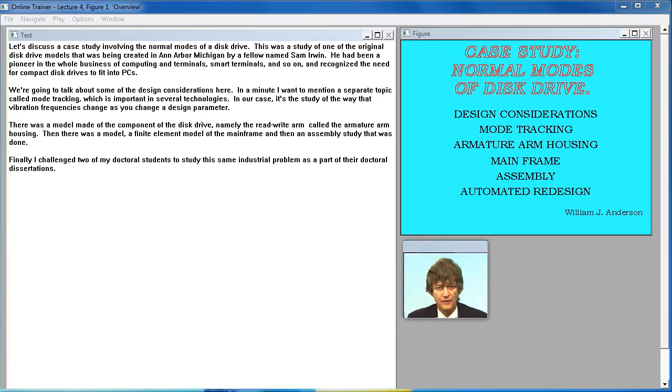Let's discuss a case study involving the normal modes of a disk drive. This was a study of one of the original disk drive models. It was being created in Ann Arbor, Michigan by a fellow named Sam Irwin. He had been a pioneer in the whole business of computing and terminals, smart terminals, and so on, and recognized the need for compact disk drives to fit into PCs.

We're going to talk about some of the design considerations here. In a minute, I want to mention a separate topic called mode tracking, which is important in several technologies. In our case, it's a study of the way that vibration frequencies change as you change a design parameter.

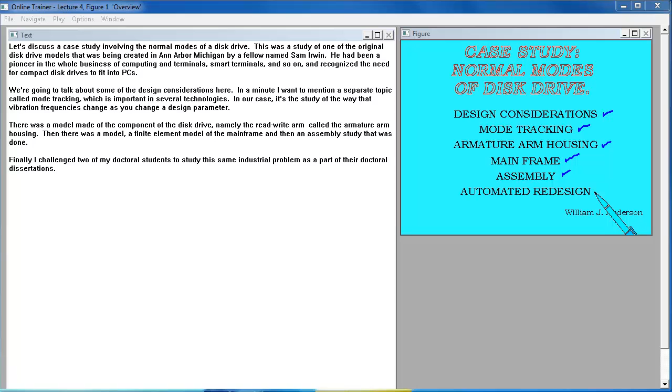There was a model made of a component of the disk drive, namely the read-write arm called the armature arm housing. Then there was a model, a finite element model of the mainframe, and then an assembly study that was done. Finally, I challenged two of my doctoral students to study this same industrial problem as a part of their doctoral dissertations.

The sponsor of this project was Irwin International of Ann Arbor, Michigan. The president was Sam Irwin, who had made his fortune in an earlier corporation that made intelligent terminals. Sam sold that company to a larger corporation and was reputed to have made some tens of millions of dollars on that deal. So this was a new venture, and Sam, I think, correctly interpreted the enormous need for disk drives to be put in smaller computers, such as the personal computers.

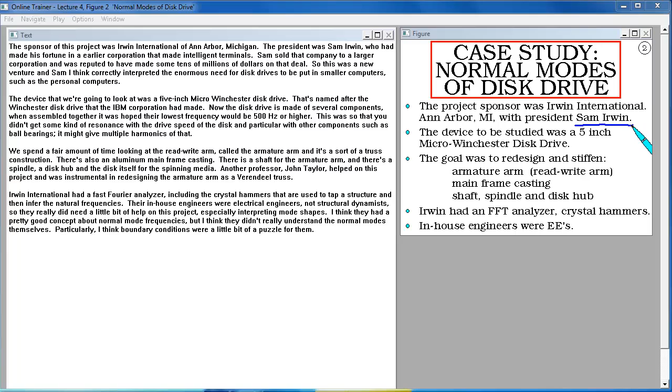The device that we're going to look at was a 5-inch micro Winchester disk drive that's named after the Winchester disk drive that the IBM Corporation had made. Now, the disk drive is made of several components. When assembled together, it was hoped their lowest frequency would be 500 hertz or higher. This was so that you didn't get some kind of resonance with the drive speed of the disk, and in particular with other components such as ball bearings that might give multiple harmonics of that.

We spent a fair amount of time looking at the read-write arm called the armature arm, and it's a sort of a truss construction. There's also an aluminum mainframe casting. There is a shaft for the armature arm, and there's a spindle, a disk hub, and the disk itself for the spinning media. Another professor, John Taylor, helped on this project and was instrumental in redesigning the armature arm as a Vierendeel truss.

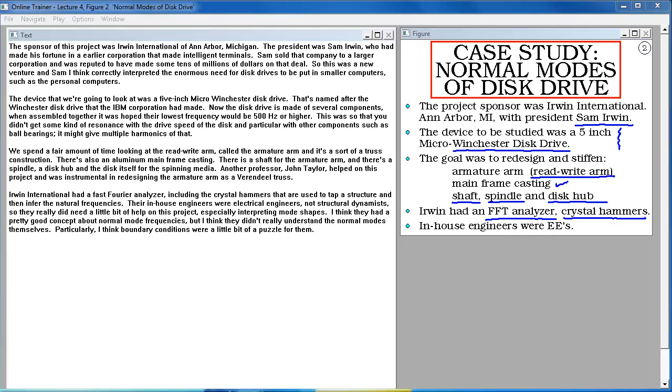Irwin International had a fast Fourier analyzer, including the crystal hammers that are used to tap a structure and then infer the natural frequencies. Their in-house engineers were electrical engineers, not structural dynamicists. So they really did need a little bit of help on this project, especially interpreting mode shapes. I think they had a pretty good concept about normal mode frequencies, but I think they didn't really understand the normal modes themselves. Particularly, I think boundary conditions were a little bit of a puzzle for them.

I can show you one of the disk drives that I picked up from Irwin International. This is one that's a partial assembly. It has the media here, which is a magnetic material that spins. There's a hub that it is clamped to. On the back side, with the spindle protruding through the one side of the casting to the other, is the motor that drives the media.

Over here, this nice arm-like thing is being controlled also by a motor, and positions this read-write arm. And it moves in a rotational way rather than translational, which is probably a little more common today. Both are used nowadays. The Winchester heads are not mounted on here. They were spring-loaded and would read both the top and the bottom side of the disk at the same time.

The hole that you see here was filled with quite a large air filter, and it turns out that filtering out smoke particles is very important. The Winchester head rides something like 12 microns over the surface of the disc, and a smoke particle can be as high as 15 microns bumping up from the disc if it's stuck there. And that can cause the Winchester head to crash. So there is some worry about keeping the bay in which the spinning disc is located absolutely clean.

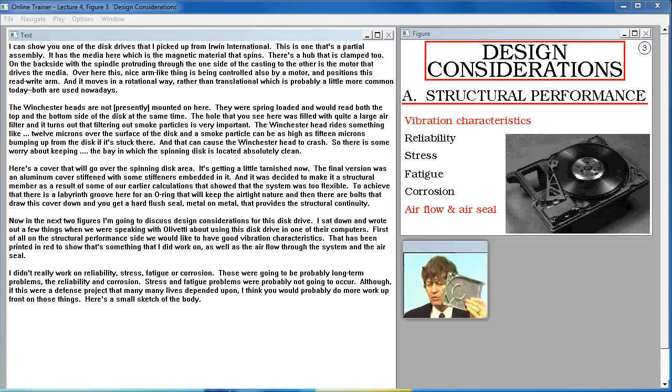Here's a cover that will go over the spinning disc area. It's getting a little tarnished now. The final version was an aluminum cover stiffened with some stiffeners embedded in it. And it was decided to make it a structural member as a result of some of our earlier calculations that showed that the system was too flexible.

To achieve that, there's a labyrinth groove here for an O-ring that will keep the airtight nature, and then there are bolts that draw this cover down, and you get a hard flush seal metal on metal that provides the structural continuity.

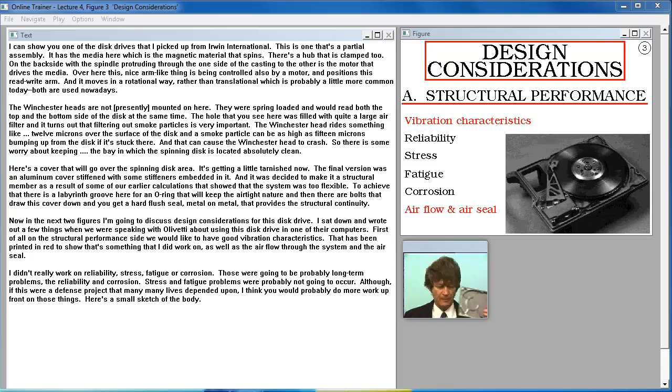Now, in the next two figures, I'm going to discuss design considerations for this disk drive. I sat down and wrote out a few things when we were speaking with Olivetti about using this disk drive in one of their computers. First of all, on the structural performance side, we would like to have good vibration characteristics. That has been printed in red to show that's something that I did work on, as well as the air flow through the system and the air seal.

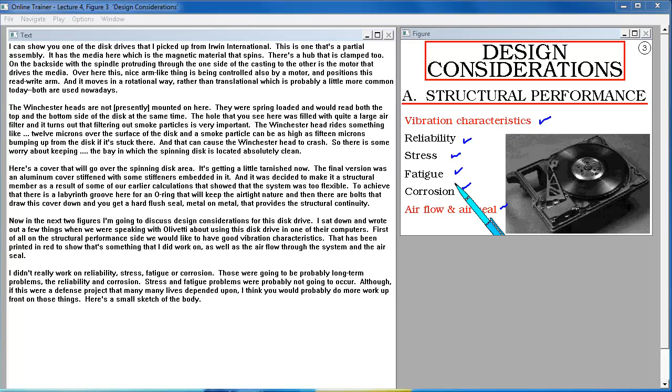I didn't really work on reliability, stress, fatigue, or corrosion. Those were going to be probably long-term problems, the reliability and corrosion. Stress and fatigue problems were probably not going to occur, although if this were a defense project that many lives depended upon, I think you would probably do more work up front on those things. Here's a small sketch of the body.

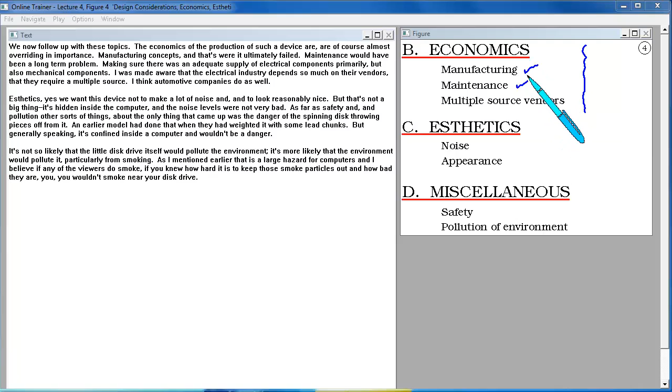We now follow up with these topics. The economics of the production of such a device are of course almost overriding in importance. Manufacturing concepts, and that's where it ultimately failed. Maintenance would have been a long-term problem. Making sure there was an adequate supply of electrical components primarily, but also mechanical components. I was made aware that the electrical industry depends so much on their vendors that they require multiple sources. I think the automotive companies do as well.

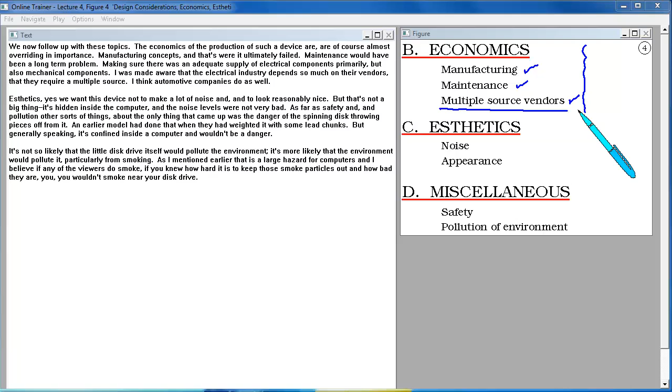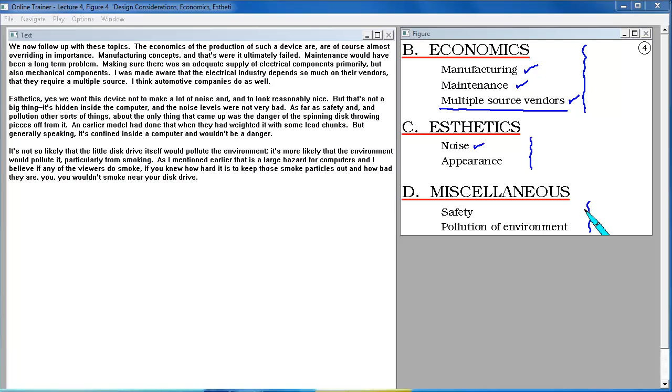Aesthetics. Yes, we want this device not to make a lot of noise and to look reasonably nice, but that's not a big thing. It's hidden inside the computer, and the noise levels were not very bad. As far as safety and pollution, about the only thing that came up was the danger of the spinning disc throwing pieces off from it. An earlier model had done that when they had weighted it with some lead chunks. But generally speaking, it's confined inside a computer and wouldn't be a danger.

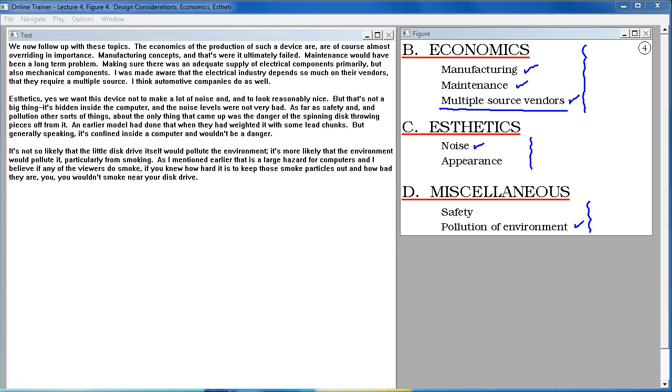It's not so likely that the little disk drive itself would pollute the environment. It's more likely that the environment would pollute it, particularly from smoking. As I mentioned earlier, that is a large hazard for computers, and I believe if any of the viewers do smoke, if you knew how hard it is to keep those smoke particles out and how bad they are, you wouldn't smoke near your disk drive.

Earlier I mentioned the concept of mode tracking. That's a fairly important problem in several industries when you're trying to follow the natural frequencies of a system over some parameter range. Now for aircraft, often wind speed is the parameter that's changing. And people like to do ground vibration studies or air off studies and then check those frequencies again as the system is flown 100 miles an hour, 200, 300, and so on. Sometimes what happens to those natural frequencies and the shape of the normal modes can determine whether you get wing flutter or other bad situations.

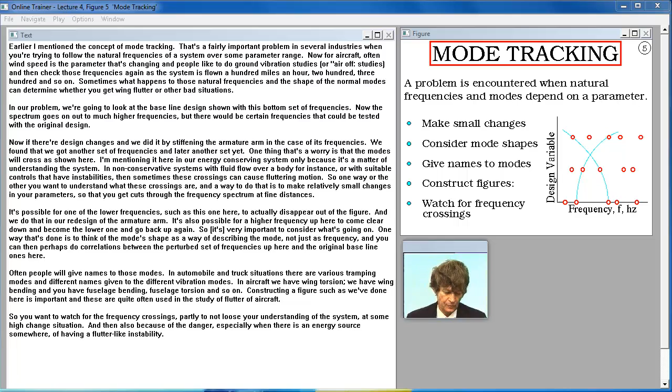In our problem, we're going to look at the baseline design shown with this bottom set of frequencies. Now the spectrum goes on out to much higher frequencies, but there would be certain frequencies that could be tested with the original design. Now if the design changes, and we did it by stiffening the armature arm, we found that we got another set of frequencies and later another set yet. One thing that's a worry is that the modes will cross, as shown here.

I'm mentioning it here in our energy conserving system only because it's a matter of understanding the system. In non-conservative systems with fluid flow over a body, for instance, or with suitable controls that have instabilities, sometimes these crossings can cause fluttering motion. So one way or the other you want to understand what these mode crossings are. And a way to do that is to make relatively small changes in your parameters so that you get cuts through the frequency spectrum at fine distances.

It's possible for one of the lower frequencies, such as this one here, to actually disappear out of the figure. And we do that in our redesign of the armature arm. It's also possible for a higher frequency up here to come clear down and become the lower one and then go back up again. So it's very important to consider what's going on.

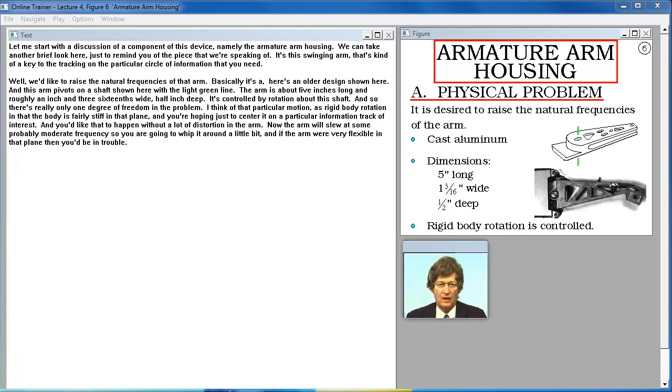Let me start with a discussion of a component of this device, namely the armature arm housing. We can take another brief look here just to remind you of the piece that we're speaking of. It's this swinging arm that's kind of the key to the tracking on the particular circle of information that you need. Well, we'd like to raise the natural frequencies of that arm.

Basically, here's an older design shown here, and this arm pivots on a shaft shown here with the light green line. The arm is about 5 inches long and roughly 1 3/16 inches wide, 1/2 inch deep. It's controlled by rotation about this shaft, and so there's really only 1 degree of freedom in the problem.

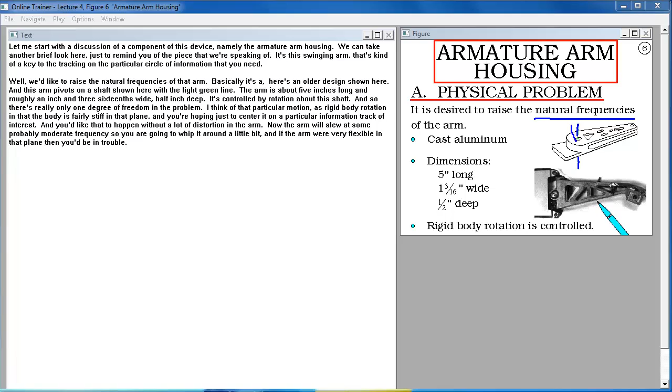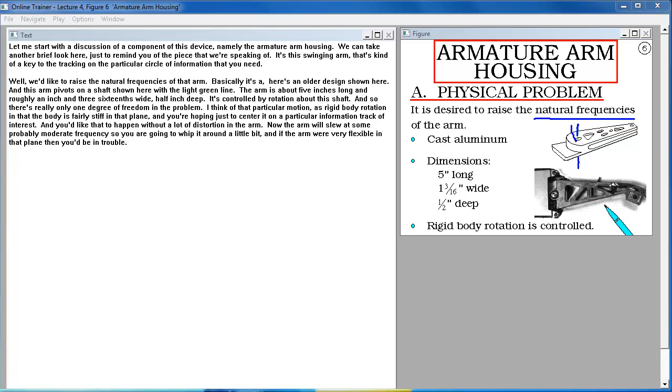I think of that particular motion as rigid body rotation in that the body is fairly stiff in that plane, and you're hoping just to center it on the particular information track of interest. And you'd like that to happen without a lot of distortion in the arm. Now the arm will slew at some probably moderate frequency, so you are going to whip it around a little bit, and if the arm were very flexible in that plane, then you'd be in trouble.

This particular part of the total project on the armature arm was carried out by a graduate student. He was available during the summer and I wanted to go on vacation, so I put it in his lap and gave him a month to do the job. Hopefully it was to have been done with 1,000 degrees of freedom, and then it would have fit into a larger system model of about 5,000 degrees of freedom.

To my surprise, when I came back from vacation, he'd actually used many, many more degrees of freedom than that and made the problem too difficult so that it didn't really have a chance to be a part of a larger system with the computing capacity that I had allowable at that time. So from that standpoint, it was a little bit of a bust in terms of the relevance for the system model, but we learned so much as a component that that carried forward.

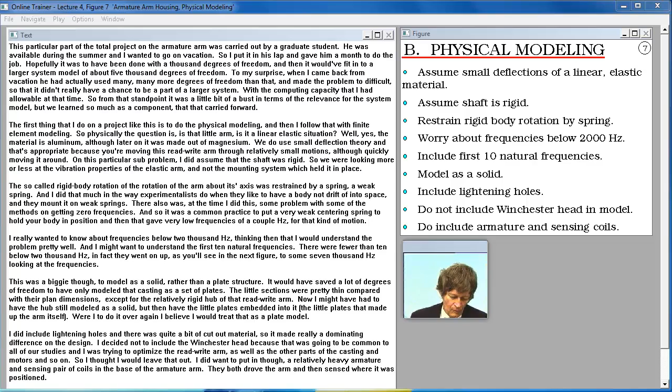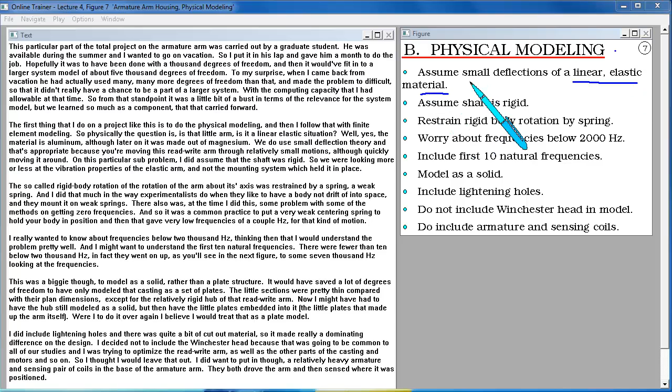The first thing that I do on a project like this is to do the physical modeling, and then I follow that with finite element modeling. So physically the question is that little arm, is it a linear elastic situation? Well, yeah, the material is aluminum, although later on it was made out of magnesium. We do use small deflection theory, and that's appropriate because you're moving this read-write arm through relatively small motions, although quickly moving it around.

On this particular sub-problem, I did assume that the shaft was rigid. So we were looking more or less at the vibration properties of the elastic arm and not the mounting system which held it in place. The so-called rigid body rotation of the arm about its axis was restrained by a spring, a weak spring. And I did that much in the way that experimentalists do when they like to have a body not drift off into space, and they mount it on weak springs.

There also was, at the time I did this, some problem with some of the methods on getting zero frequencies. And so it was a common practice to put a very weak centering spring to hold your body in position. And then that gave very low frequencies of a couple hertz for that kind of motion. I really wanted to know about frequencies below 2,000 hertz, thinking that then I would understand the problem pretty well, and I might want to understand the first 10 natural frequencies. There were fewer than 10 below 2,000 hertz.

In fact, I went on up, as you'll see on the next figure, to some 7,000 hertz, looking at the frequencies. This was a biggie, though, to model as a solid rather than a plate structure. It would have saved a lot of degrees of freedom to have only modeled that casting as a set of plates. The little sections were pretty thin compared with their planform dimensions, except for the relatively rigid hub of that read-write arm.

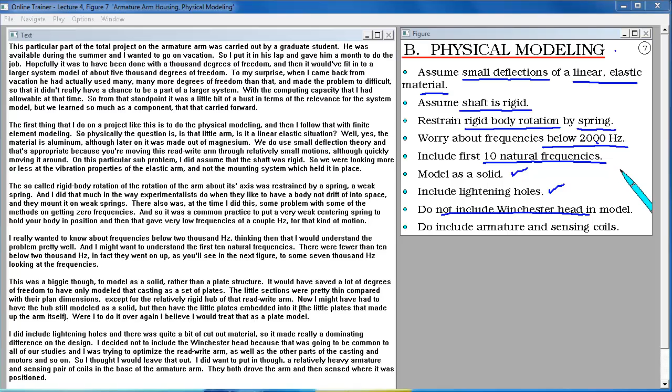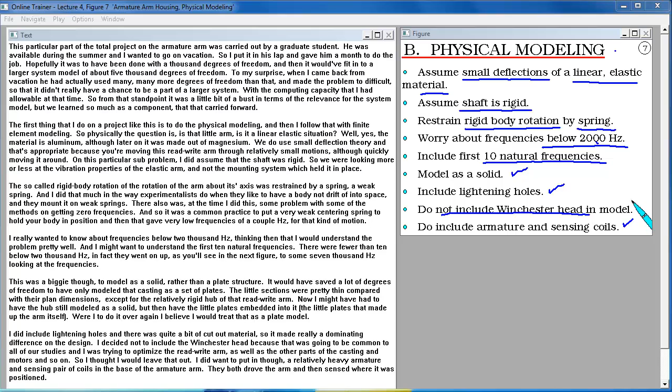I decided not to include the Winchester head because that was going to be common to all of our studies, and I was trying to optimize the read-write arm as well as the other parts of the casting, motors, and so on. So I thought I would leave that out. I did want to put in, though, a relatively heavy armature and sensing pair of coils in the base of the armature arm. They both drove the arm and then sensed where it was positioned.

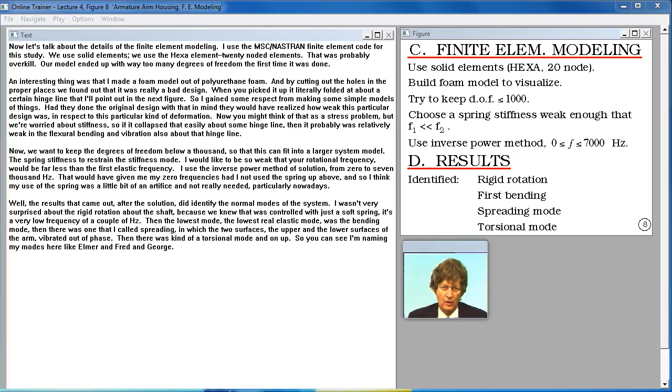Now let's talk about the details of the finite element modeling. I used the MSC Nastran finite element code for this study. We used solid elements, the hexa element, 20-noded elements. That was probably overkill. Our model ended up with way too many degrees of freedom the first time it was done. An interesting thing was that I made a foam model out of polyurethane foam, and by cutting out the holes in the proper places, we found that it was really a bad design.

When you picked it up, it literally folded about a certain hinge line that I'll point out in the next figure. So I gained some respect for making some simple models of things. Had they done the original design with that in mind, they would have realized how weak this particular design was in respect to this particular kind of a deformation. Now, you might think of that as a strength problem, but we're worried about stiffness. So if it collapsed that easily about some hinge line, it probably was relatively weak in flexural bending, in vibration also about that hinge line.

Now, we want to keep the degrees of freedom below 1,000 so that this can fit into a larger system model. The spring stiffness to restrain the rotational mode I would like to be so weak that your rotational frequency would be far less than the first elastic frequency. I used the inverse power method of solution from 0 to 7,000 hertz. That would have given me my zero frequencies had I not used the spring up above, and so I think my use of the spring was a little bit of an artifice and not really needed, particularly nowadays.

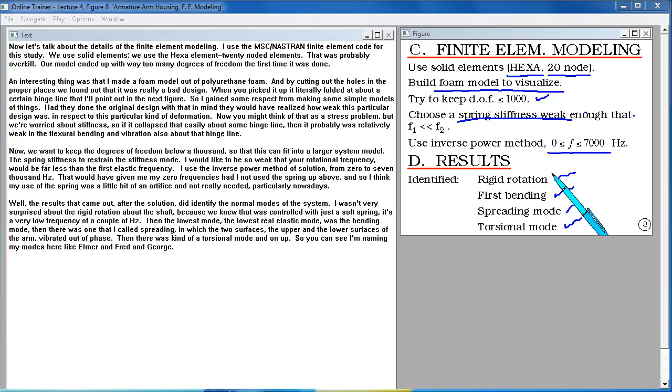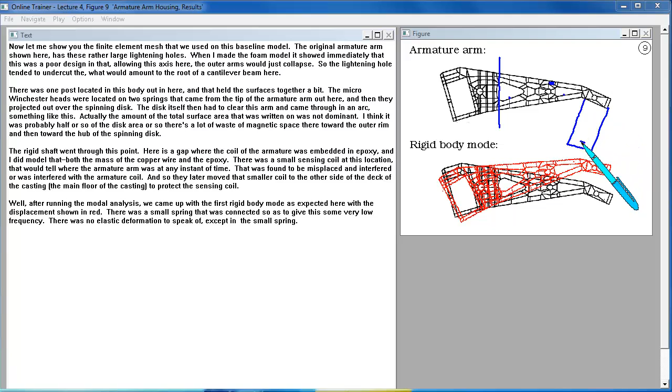The micro Winchester heads were located on two springs that came from the tip of the armature arm out here, and then they projected out over the spinning disc. The disc itself then had to clear this arm and came through in an arc, something like this. Actually, the amount of the total surface area that was written on was not dominant. I think it was probably half or so of the disc area, so there's a lot of wasted magnetic space there toward the outer rim and toward the hub of the spinning disc.

The rigid shaft went through this point. Here is a gap where the coil of the armature was embedded in epoxy, and I did model that, both the mass of the copper wire and the epoxy. There was a small sensing coil at this location that would tell where the armature arm was at any instant of time. That was found to be misplaced and interfered, or was interfered with by, the armature coil, and so they later moved that smaller coil to the other side of the deck of the casting, the main floor of the casting, to protect the sensing coil.

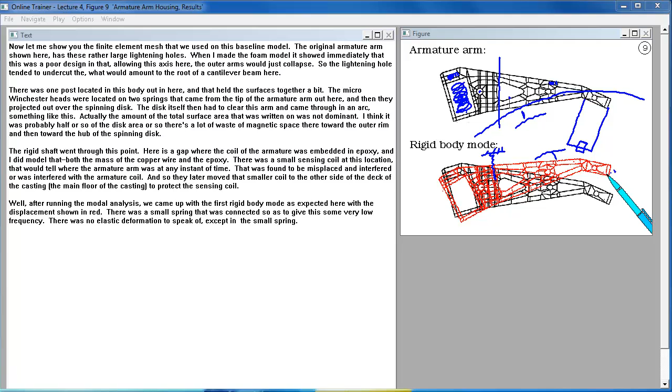Well, after running the modal analysis, we came up with the first rigid body mode as expected here, with the displacement shown in red. There was a small spring that was connected so as to give this some very low frequency. There was no elastic deformation to speak of except in the small spring.

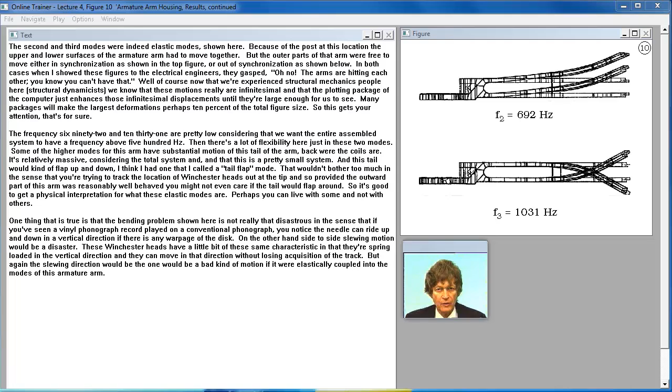The second and third modes were indeed elastic modes, shown here. Because of the post at this location, the upper and lower surfaces of the armature arm had to move together, but the outer parts of that arm were free to move either in synchronization as shown in the top figure or out of synchronization as shown below. In both cases, when I showed these figures to the electrical engineers, they gasped, "Oh no, the arms are hitting each other, you know, you can't have that."

Well, of course, now that we're experienced structural mechanics people here, structural dynamicists, we know that these motions really are infinitesimal and that the plotting package of the computer just enhances those infinitesimal displacements until they're large enough for us to see. Many plot packages will make the largest deformation perhaps 10% of the total figure size. So this gets your attention, that's for sure.

The frequencies 692 and 1031 are pretty low considering that we want the entire assembled system to have a frequency above 500 hertz, and there's a lot of flexibility here just in these two modes. Some of the higher modes for this arm have substantial motion of this tail of the arm back where the coils are. It's relatively massive considering the total system and that this is a pretty small system. And this tail would kind of flap up and down. I think I had one that I called a tail flap mode.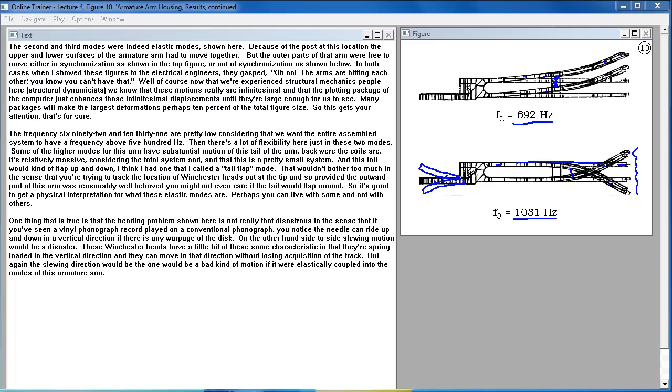One thing that is true is that the bending problem shown here is not really that disastrous in the sense that if you've seen a vinyl phonograph record played on a conventional phonograph, you notice the needle can ride up and down in the vertical direction if there's any warpage of the disc. On the other hand, side-to-side slewing motion would be a disaster.

These Winchester heads have a little bit of that same characteristic in that they're spring-loaded in the vertical direction, and they can move in that direction without losing acquisition of the track. But again, the slewing direction would be the one that would be a bad kind of motion if it were elastically coupled into the modes of this armature arm.

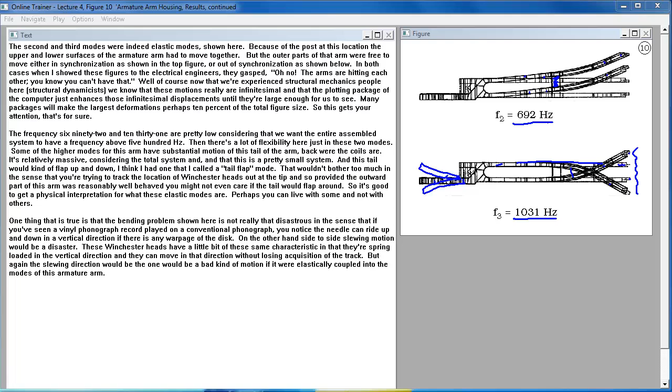There were a total of 3 finite element frequency runs made. The first 2 had to do with the baseline design and then a modified baseline design where 2 more posts were added between the upper and lower surfaces of the arm. The third study had to do with a complete redesign where John Taylor helped lay out a Vierendeel truss and was able to lighten the structure and make it look prettier as well.

You probably remember my saying that this model with 4,800 degrees of freedom was too complicated for the final system model, but it was easy to modify and add a couple posts outboard to give us a second run. The third run shown here came in under 1,000 degrees of freedom as I had desired, and this was another graduate student, Kim, who did this particular job and did a nice job on that.

Now, if the difference in design 1 and design 2 had to do with adding posts outboard, then it turns out that has no effect on the rigid body rotation on the rigid shaft. Neither did the redesign later. But those outboard posts did stiffen the first bending mode. That could be expected because you would have a shear coupling then between the top and bottom fibers of something acting in a beam-like manner.

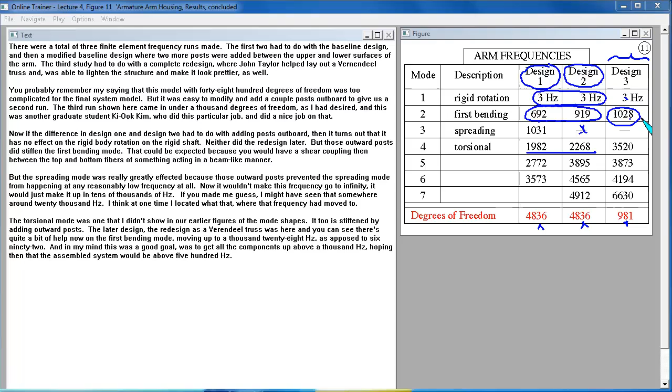The later design, the redesign as a Vierendeel truss, was here, and you can see there's quite a bit of help now on the first bending mode, moving up to 1028 Hertz as opposed to 692. And in my mind, this was a good goal, to get all the components up above 1000 Hertz, hoping then that the assembled system would be above 500 Hertz.

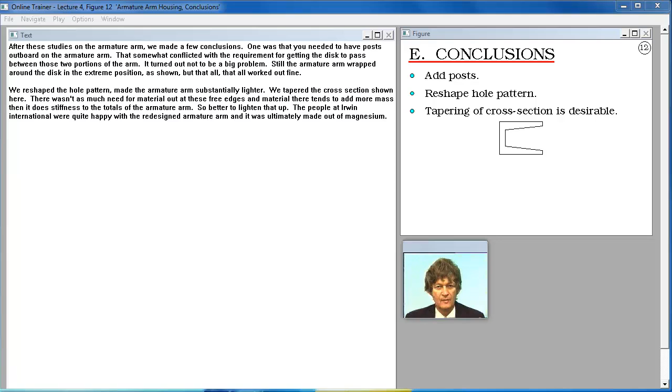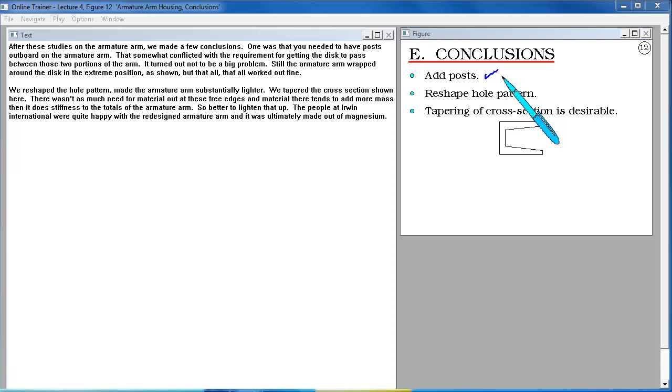After these studies on the armature arm, we made a few conclusions. One was that you needed to have posts outboard on the armature arm. That somewhat conflicted with the requirement for getting the disc to pass between those two portions of the arm, but turned out not to be a big problem. Still, the armature arm wrapped around the disc in the extreme position as shown, but that all worked out fine.

We reshaped the hole pattern, made the armature arm substantially lighter. We tapered the cross section shown here. There wasn't as much need for material out at these free edges, and material there tends to add more mass than it does stiffness to the total armature arm, so better to lighten that up. The people at Irwin International were quite happy with the redesigned armature arm, and it was ultimately made out of magnesium.

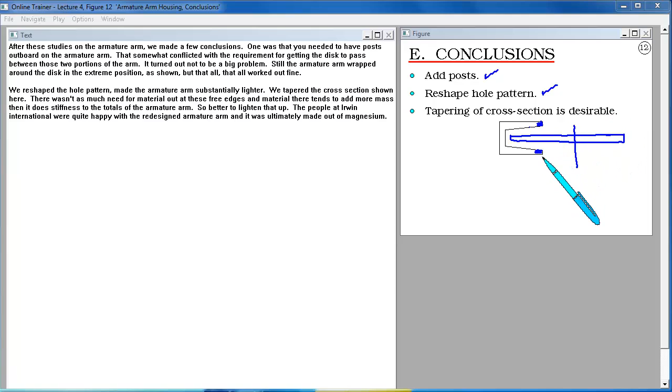After completing the armature arm problem, then I was asked to do the mainframe normal modes. This was a single-piece aluminum casting. One problem is that you're not allowed with a casting to have sections that are thinner than a certain amount because of possible cracking. In this case, at the time we were doing this, 90 thousandths of an inch thick was what they wanted to maintain. That's a little bit heavy. I'm sure they do better than that nowadays. 90 thousandths would be a little over 2 millimeters.

Here's the casting. It's the same one that I've shown you the actual model of. It's aluminum, thin-walled, has a lot of reinforcing ribs, but the natural frequencies were too low. They were 318 Hertz and 478 Hertz as we calculated them and measured them. We were afraid that vibration at those lower frequencies might couple in with the rotational rates here and harmonics of that, the way the ball bearings would move around in the races.

The rotation speed was about 3,000 RPM or about 50 Hertz at that time. So that 50 Hertz dominant motion is kind of the driveline motion of the system, and then depending how your bearings act, if there's some nonlinear excitation there, you might get so-called superharmonics up at 100 Hertz, 150, 200, and so on. It was felt that if we could stiffen this casting and raise all natural frequencies above 500 Hertz, we would be okay.

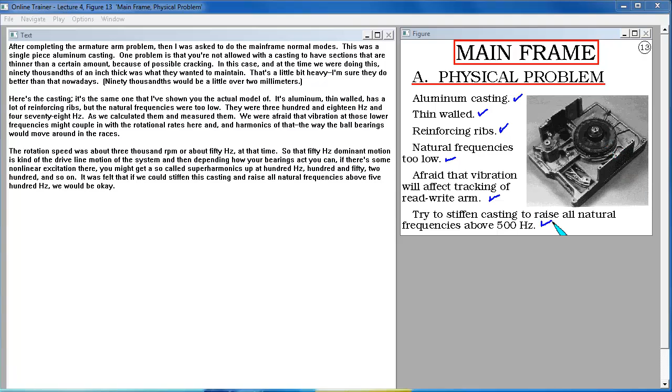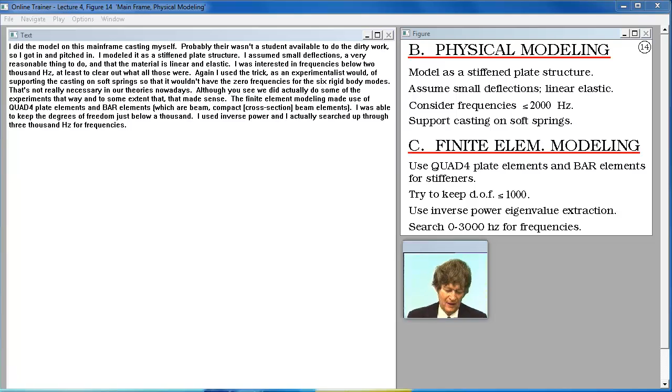I did the model on this mainframe casting myself. Probably there wasn't a student available to do the dirty work, so I got in and pitched in. I modeled it as a stiffened plate structure. I assumed small deflections, a very reasonable thing to do, and that the material is linear and elastic. I was interested in frequencies below 2,000 Hertz, at least to clear out what all those were.

Again, I used the trick as an experimentalist would of supporting the casting on soft springs so that it wouldn't have the zero frequencies for the 6 rigid body modes. That's not really necessary in our theories nowadays, although you see we did actually do some of the experiments that way, and to some extent that made sense.

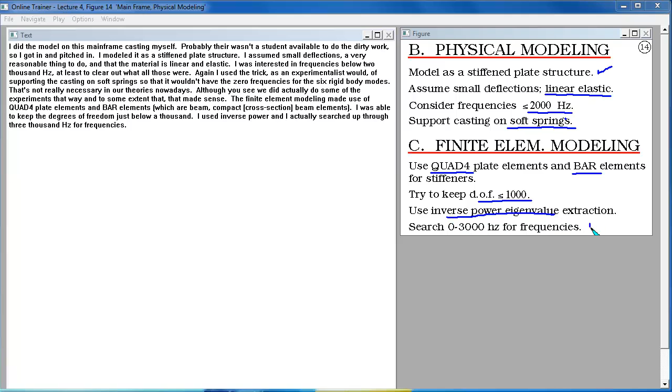The finite element modeling made use of quad 4 plate elements and bar elements, which are compact beam elements. I was able to keep the degrees of freedom just below 1,000. I used inverse power, and I actually searched up through 3,000 hertz for frequencies. The lowest two elastic modes were of great interest to Irwin International. They came in at 318 hertz and 478, both in the danger region.

The lower one, as you might expect after you think about it a little, is a twisting mode, and I'll view it from the open end of the casting as shown. The far end might have, for instance, this green deformation pattern, and the near end might have this blue pattern. This is a little bit like the vibration of a thin-walled, open cross-section beam, and you know that that is a particularly flexible kind of motion for open section beams. So it kind of makes sense. It's sort of a torsional motion.

Then the cylindrical bending is shown here, where the walls alternately flop outward and inward, and that happens along the length of the casting, so I'm calling it cylindrical in the general sense. It's a general cylinder shape. 478 hertz, still in the bad region.

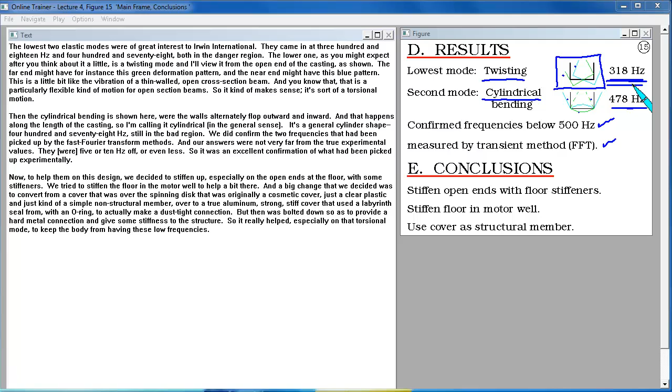So we did confirm the two frequencies that had been picked up by the fast Fourier transform methods, and our answers were not very far from the true experimental values. It was 5 or 10 hertz off, or even less. So it was an excellent confirmation of what had been picked up experimentally.

Now, to help them on this design, we decided to stiffen up, especially on the open ends at the floor, with some stiffeners. We tried to stiffen the floor in the motor well to help a bit there. And a big change that we decided was to convert from a

cover that was over the spinning disc that originally was kind of a cosmetic cover, just clear plastic and a simple non-structural member, over to a true aluminum strong stiff cover that used a labyrinth seal with an O-ring to actually make a dust tight connection, but then was bolted down so as to provide a hard metal connection and give some stiffness to the structure. So it really helped, especially on that torsional mode, to keep the body from having these low frequencies.

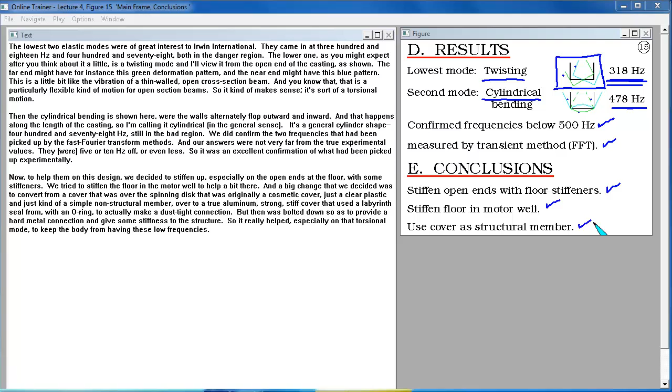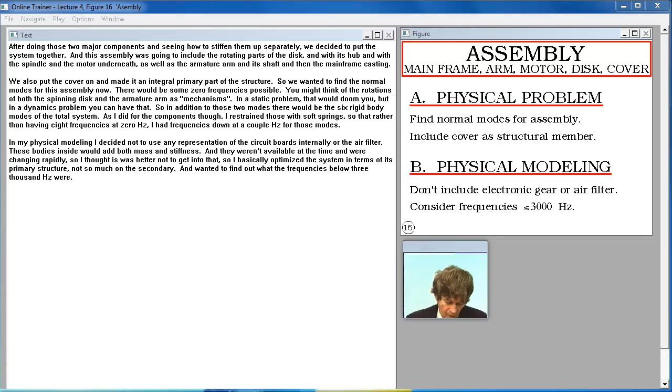After doing those two major components and seeing how to stiffen them up separately, we decided to put the system together. And this assembly was going to include the rotating parts of the disc with its hub, with the spindle and the motor underneath, as well as the armature arm and its shaft, and then the mainframe casting. We also put the cover on and made it an integral primary part of the structure. So we wanted to find the normal modes for this assembly now.

There would be some zero frequencies possible. You might think of the rotations of both the spinning disc and the armature arm as mechanisms. In a static problem that would doom you, but in a dynamics problem you can have that. So in addition to those two modes, there would be the 6 rigid body modes of the total system. As I did for the components, though, I restrained those with soft springs so that rather than having 8 frequencies at 0 hertz, I had frequencies down at a couple hertz for those modes.

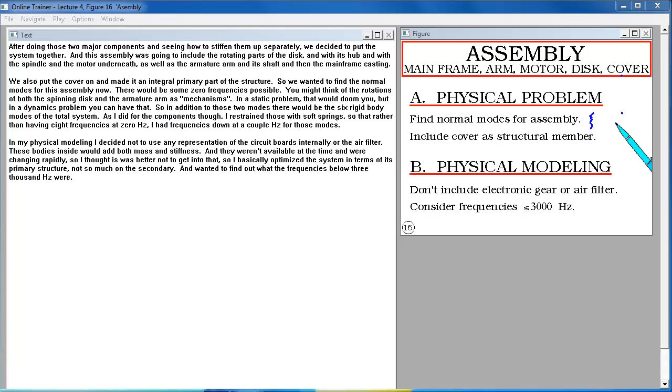In my physical modeling, I decided not to use any representation of the circuit boards internally or the air filter. These bodies inside would add both mass and stiffness, and they weren't available at the time, and they were changing rapidly, so I thought it was better not to get into that. So I basically optimized the system in terms of its primary structure and not so much on this secondary, and wanted to find out what the frequencies below 3,000 hertz were.

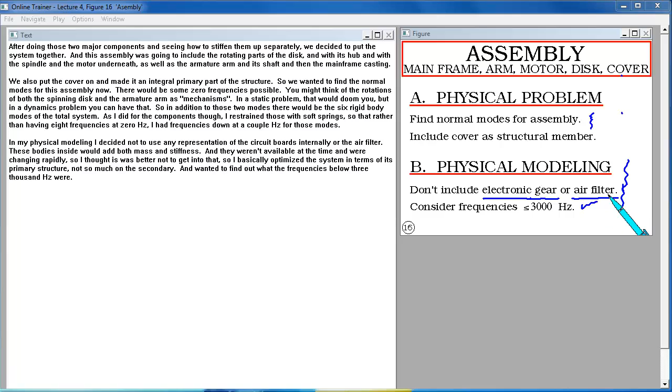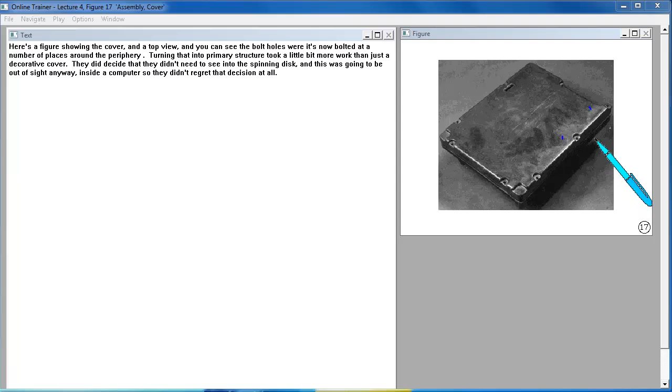the spinning disc. You might ask whether a spinning disc wouldn't affect the modes of vibration, and there could be a coupling there. You could have the gyroscopic effects. That's an energy conserving concept and wouldn't add energy to the system, but in fact could do some kind of coupling between the modes. We neglected that in any event and decided we would assemble all of our components together. We had some solids in the armature arm and a lot of plates and beams in the other portions.

The ball bearings in the bearing wells were modeled not as real structures, but rather as spiders. In other words, with some radial stiffnesses that set the shaft and the spindle off from the walls of the housing. These stiffnesses were given to us by a Japanese ball bearing company that was going to provide the bearings for this system, and they were really good about giving technical data, and they had measured values for the stiffnesses

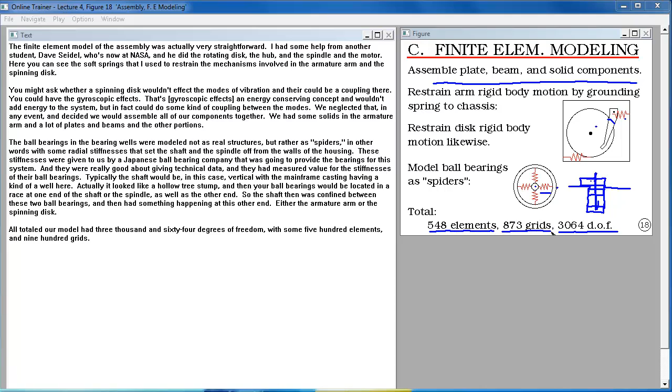Here's the mesh for the system. Because I'm using this stick model, or sometimes called wireframe model, without any hidden line removal, you can get the always obnoxious optical illusion, which will make this picture alternately flip with the walls going away from you or toward you. I seem to have an easier view with this wall projecting toward me right now, so I'll view it that way. Here's the armature arm then, which would be actually on the far side under that viewpoint, with the well here for the shaft.

The motor and the spindle would be here with a spindle protruding through the floor of the casting, the mainframe casting. The rotating disc is shown here, a rather simple model with only some 8 segments around the periphery. The cover is shown on what would, in my view of this image, be at the bottom of the disk drive. So I'm looking at this from the underside, basically, where the two walls are pointing up out of the page toward me. So this is a system, and we're interested in how this behaves.

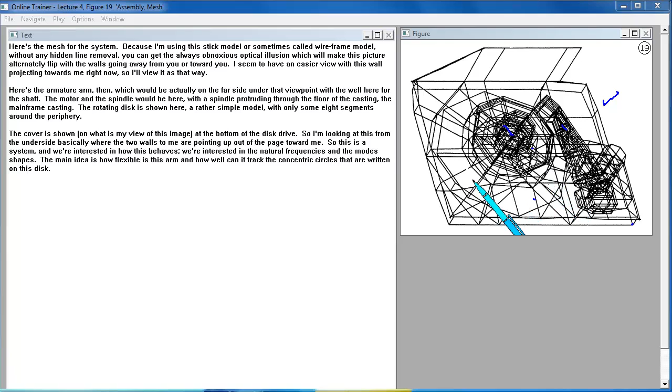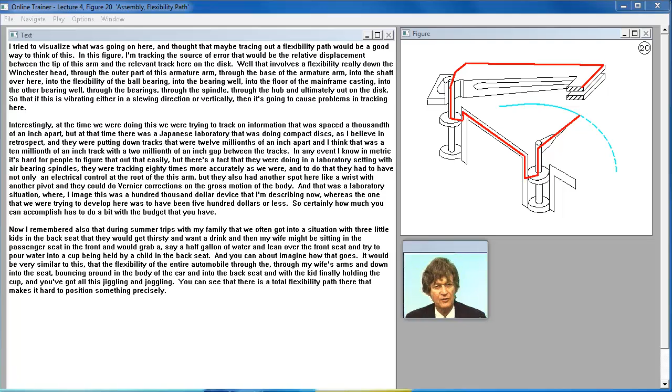We're interested in the natural frequencies and mode shapes. The main idea is how flexible is this arm and how well can it track the concentric circles that are written on this disc. I tried to visualize what was going on here and thought that maybe tracing out a flexibility path would be a good way to think of this. In this figure, a source of error then would be the relative displacement between the tip of this arm and the relevant track here on the disc.

Well, that involves the flexibility really down the Winchester head, through the outer part of this armature arm, through the base of the armature arm, into the shaft over here, into the flexibility of the ball bearing, into the bearing well, into the floor of the mainframe casting, into the other bearing well, through the bearings, through the spindle, through the hub, and ultimately out on the disc. So if this is vibrating either in a slewing direction or vertically, then it's going to cause problems in tracking here.

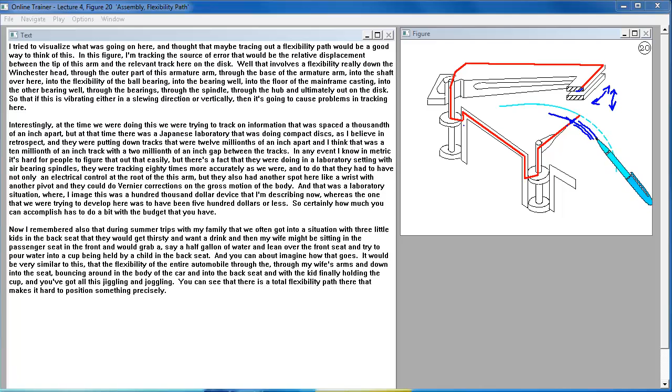Interestingly, at the time we were doing this, we were trying to track on information that was spaced 1/1000th of an inch apart, but at that time there was a Japanese laboratory that was doing compact discs, I believe, in retrospect, and they were putting down tracks that were 12 millionths of an inch apart, I think that was like a 10 millionth of an inch track with a 2 millionth of an inch gap between the tracks. In any event, I know in metric it's hard for people to figure that out easily, but they were doing this in a laboratory setting with air-bearing spindles.

They were tracking 80 times more accurately than we were, and to do that they had to have not only electrical control at the root of this arm, but they also had another spot here like a wrist with another pivot, and they could do vernier corrections on the gross motion of the body. And that was a laboratory situation where I imagine this was a $100,000 device, whereas the one that we were trying to develop here was to have been $500 or less. So certainly how much you can accomplish has to do a bit with the budget that you have.

Now, I remembered also that during summer trips with my family, we often got into a situation with 3 little kids in the back seat that would get thirsty and want to drink, and then my wife might be sitting in the passenger seat in the front and would grab say a half gallon of water and lean over the front seat and try to pour water into a cup being held by a child in the back seat. And you can about imagine how that goes.

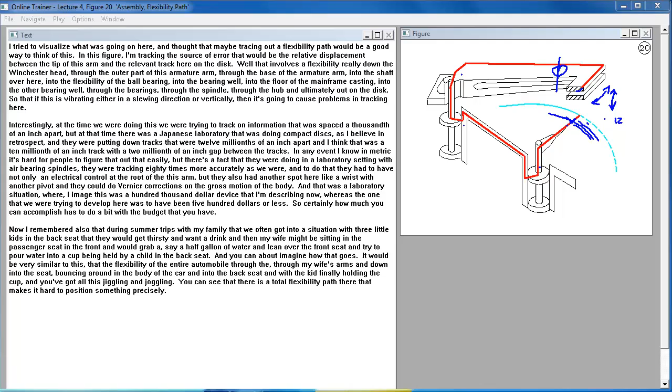It would be very similar to this, the flexibility of the entire automobile through my wife's arms and down into the seat, bouncing around in the body of the car and into the back seat, and with the kid finally holding the cup, and you got all this jiggling and joggling. You can see that there is a total flexibility path there that makes it hard to position something precisely.

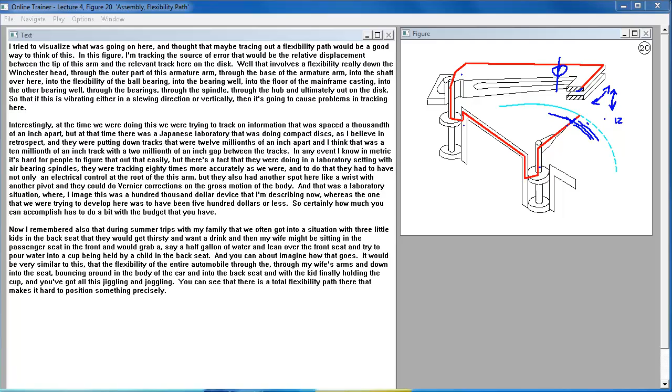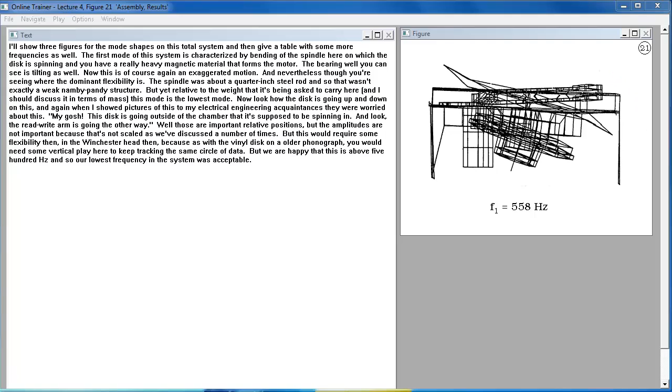I'll show 3 figures for the mode shapes on this total system and then give a table with some more frequencies as well. The first mode of this system is characterized by bending of the spindle here on which the disc is spinning, and you have the relatively heavy magnetic material that forms the motor. The bearing well, you can see, is tilting as well. Now, this is, of course, again, an exaggerated motion, and nevertheless, though, you're seeing where the dominant flexibility is.

The spindle was about a 1/4 inch steel rod, and so that wasn't exactly a weak namby-pamby structure, but yet relative to the weight that it's being asked to carry here, and I should discuss it in terms of mass, this mode is the lowest mode. Now look how the disc is going up and down on this. And again, when I showed pictures of this to my electrical engineering acquaintances, they were worried about this. My gosh, the disc is going outside of the chamber that it's supposed to be spinning in. And look, the read-write arm is going the other way.

Well, those are important relative positions, but the amplitudes are not important because that's not scaled, as we've discussed a number of times. But this would require some flexibility then in the Winchester head, because as with the vinyl disc on an older phonograph, you would need some vertical play here to keep tracking the same circle of data. But we are happy that this is above 500 hertz, and so our lowest frequency in the system was acceptable.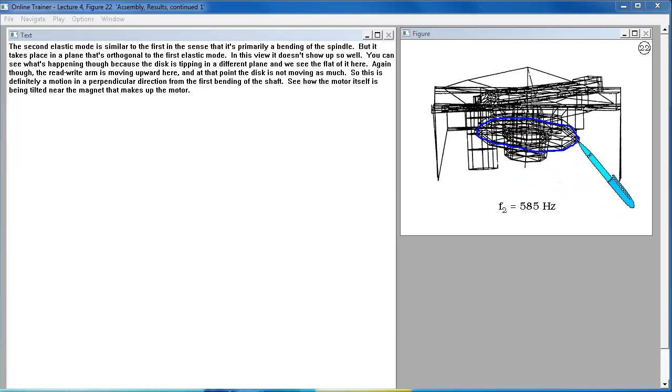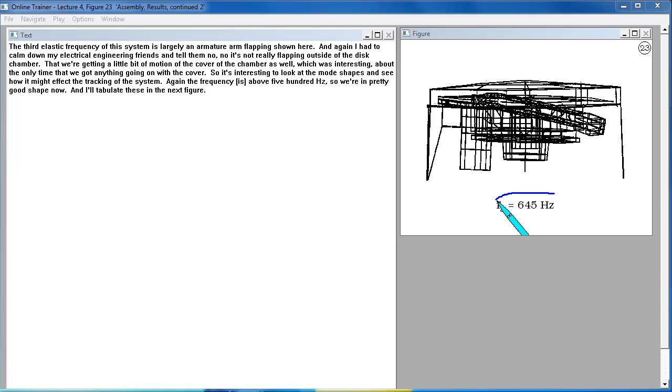The third elastic frequency of the system is largely an armature arm flapping, shown here. And again, I had to calm down my electrical engineering friends and tell them, no, it's not really flapping outside of the disc chamber. We're getting a little bit of motion of the cover of the chamber as well, which was interesting. About the only time that we got anything going on with the cover. So it's interesting to look at the mode shapes and see how it might affect the tracking of the system. Again, the frequency is above 500 hertz, so we're in pretty good shape now, and I'll tabulate these in the next figure.

Here I'll show the tabulation of frequencies with some names about mode shapes. We show two different studies for the assembly. One was the assembly without the cover, and the other is assembly with the cover. We also can hearken back to the mainframe solution standing alone. When you add the gear onto the main frame consisting of the armature arm and the spindle with the motor and disc on it, you actually lower the system frequency. And that was what we had expected initially, that the assembly would have lower frequencies than the components individually. But when you put the cover on, then you stiffen it up quite a bit. So that cover really was helpful and brought us into the safe region.

Likewise with this higher mode here, as we put on the armature arm and the spindle with its motor and disc, we got this frequency at 303. These are relatively close because the real source of flexibility here is in the spindle, not in what the sidewall is doing. Finally, if you put on the cover, it raises that second frequency nicely as well. The third frequency, which we thought of as an arm flap here, was up a bit higher initially and then was raised nicely by the stiffening of the cover.

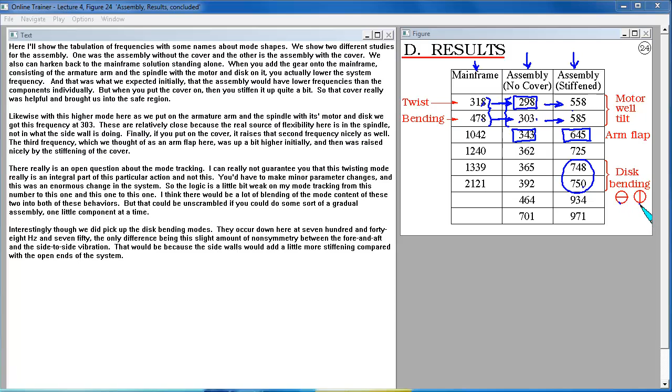Interestingly, though, we did pick up the disk bending modes. They occur down here at 748 hertz and 750. The only difference being the slight amount of non-symmetry between the fore and aft and the side-to-side vibration. That would be because the sidewalls would add a little more stiffening compared with the open ends of the system.

Unfortunately, the attempt to come out with the first mass-produced disk drive for PCs failed. Irwin International went bankrupt, and the surviving effort in that entire project turned out to be the relatively fast tape recorder that was put in it, and the tape drive could record the entire amount of information on that disk in just a short time. I think the number at the time was 2 minutes for the 5 megabytes.

Now those rates are not high in today's market, so this was certainly an early attempt, but a very good attempt. It also reminds us, though, that even though you work hard on the engineering side, you also have to do a good job on the manufacturing side. And I heard critics of this project predict the failure because of manufacturing right from the outset.

From the day I walked in to help these fellows as little as I could, there were other computer people in town that were saying that they'd never be able to make it. And that did turn out, apparently. But what a noble try, and had they succeeded, they would have been an enormous company by now. You've seen other disk drive companies that made it and are just enormous companies now. So what a good try at making one of the first compact disk drives.

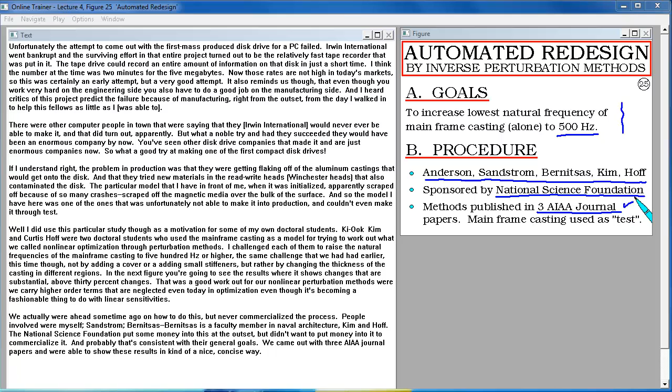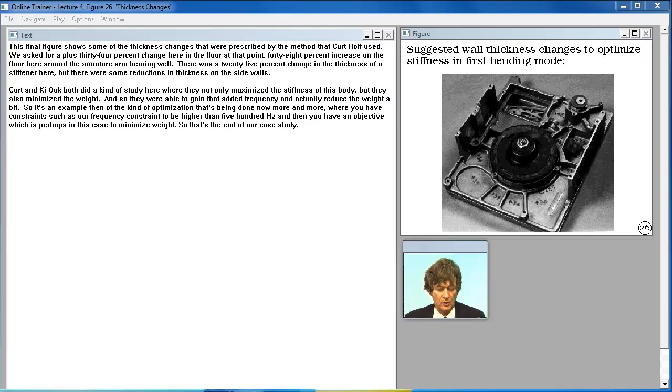This final figure shows some of the thickness changes that were prescribed by the method that Curt Hoff used. We asked for a plus 34% change here in the floor at that point, 48% increase on the floor here around the armature arm bearing well. There was a 25% change in the thickness of a stiffener here. But there were some reductions in thickness on the side walls.

Curt and Ki-Ook both did a kind of study here where they not only maximized the stiffness of this body, but they also minimized the weight. And so they were able to gain that added frequency and actually reduce the weight a bit. So it's an example then of the kind of optimization that's being done now more and more, where you have constraints such as our frequency constraint to be higher than 500 hertz, and then you have an objective which is perhaps in this case to minimize weight. So that's the end of our case study.